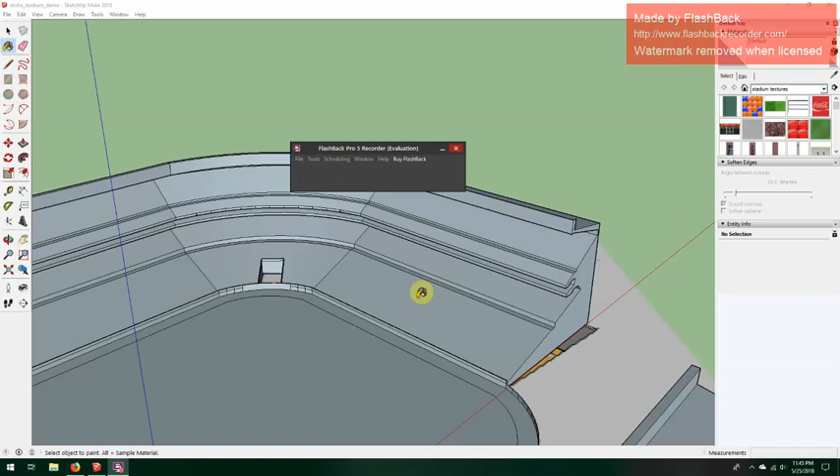As you can see, we've built the stands and the field in the last episode, along with some details on the stands themselves, like the dugouts, the runways, and the driveway for the trucks out in center field. This episode, I'd like to work on getting the fences above the wall detailed out and built.

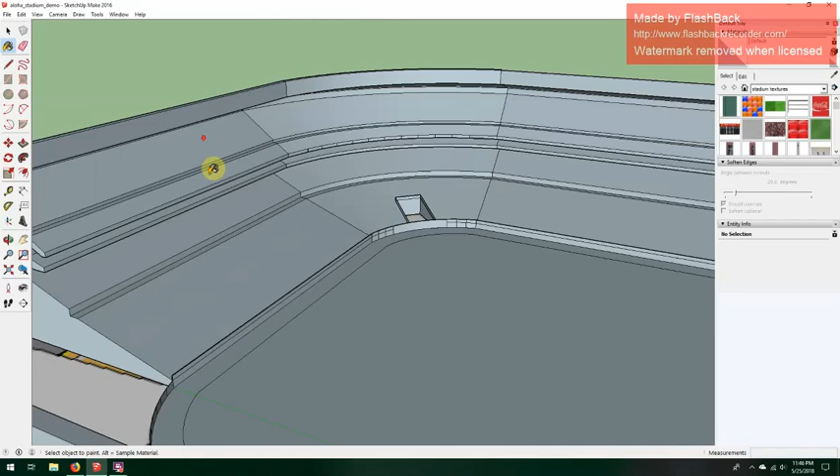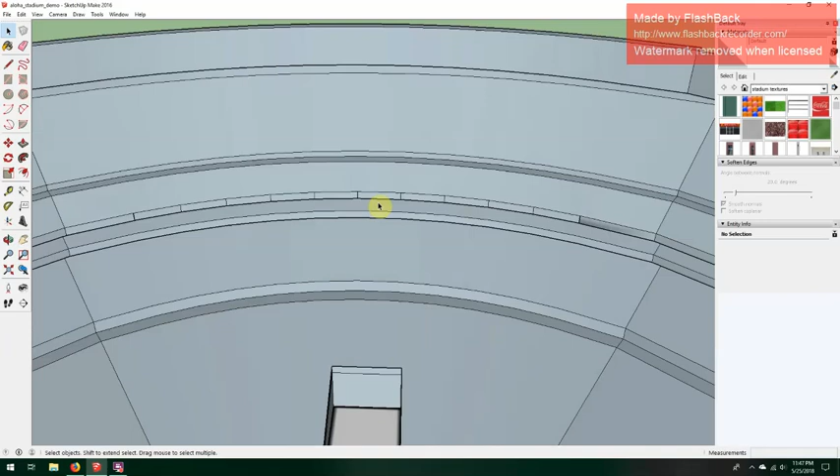So let's get going. The first thing we're going to do is the scoreboard. I have the sections here, and I'm going to start by drawing a line up from here, one of the beginnings of the middle deck. There are four sections I'd mark off for the scoreboard - section one, two, three, and four. I'll show you what I mean.

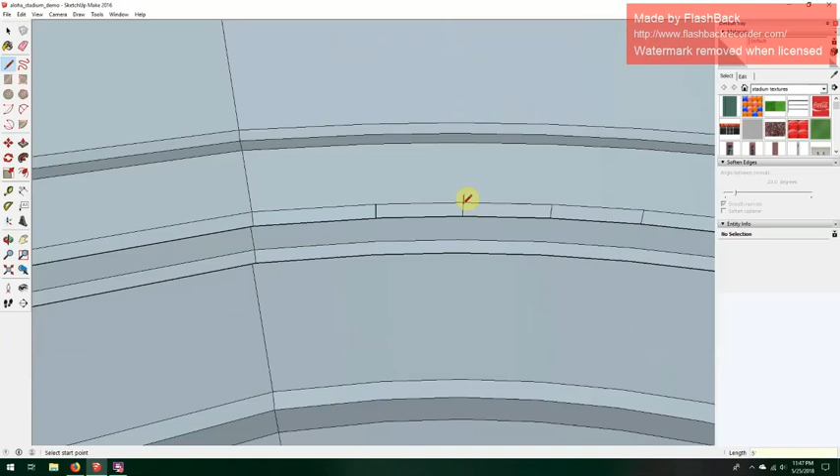So I'm simply going to start here, draw a line up about 5 feet, cut over, then come down on the blue axis a little past the second deck. That's going to be the height of the scoreboard.

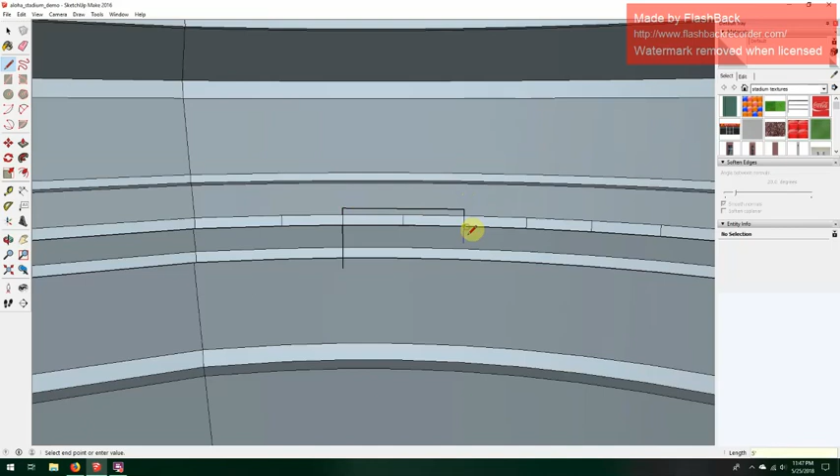I'll skip a line, go to the second line, and do the same thing - touch that point, come back, and it lines up and connects. Then we come down on the blue axis, and when you see that line, you know it's even, and there it draws the face.

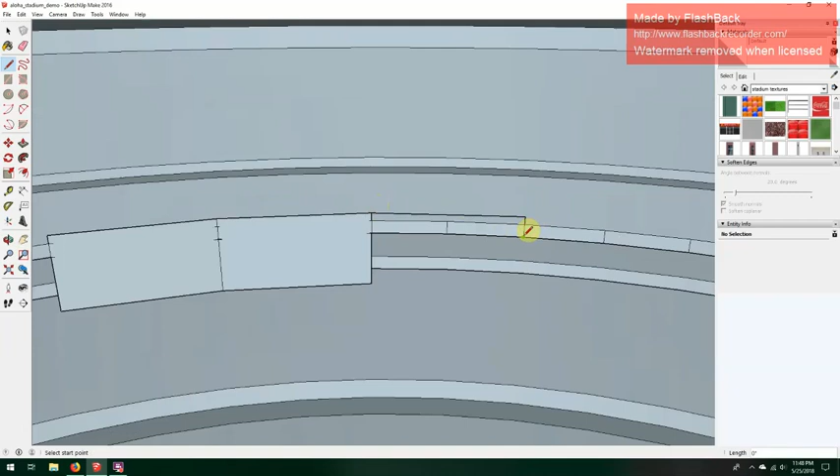Skip another line, do the same thing - go up, connect to the other dot, come down and connect. We want to be on the blue axis, connect, come down, connect. Pretty simple actually. Then the final section - connect, come down, connect. So now we'll have the scoreboard right there.

We'll basically fill in the sections with advertisements in a later episode.

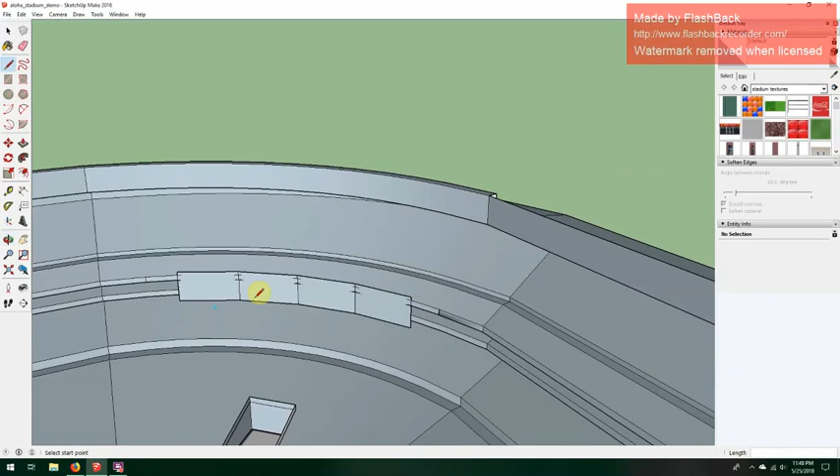Don't worry about these extra lines. As you zoom out it looks worse and worse, but zooming in it gets better. Those lines won't show in the final product, so you can go through and click to delete them, but it doesn't really matter - I'm not going to worry about it too much. I'll just delete that line. So that's the scoreboard, that's one section.

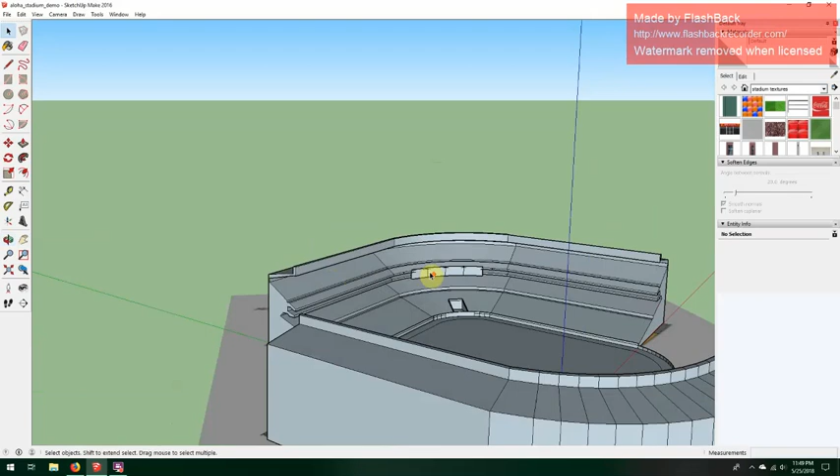Now the other piece is the fence. As you see, there's a half wall, half fence - about 5 feet of wall, 3 feet of fence. I have that marked off here; we did that when we built the wall.

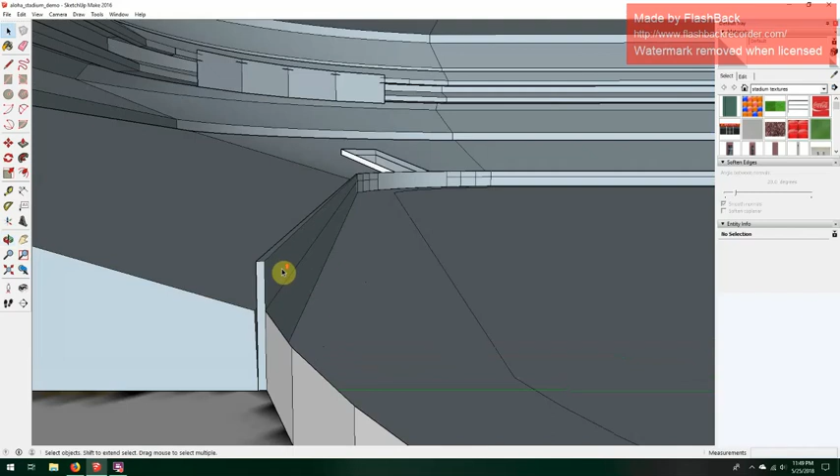Now the problem is that when we do the texturing, the fence is see-through, and this has two separate faces. For see-through fencing, we want basically one face or one section, so we're going to delete this - remove this back face here. To do that, we need to cordon this off.

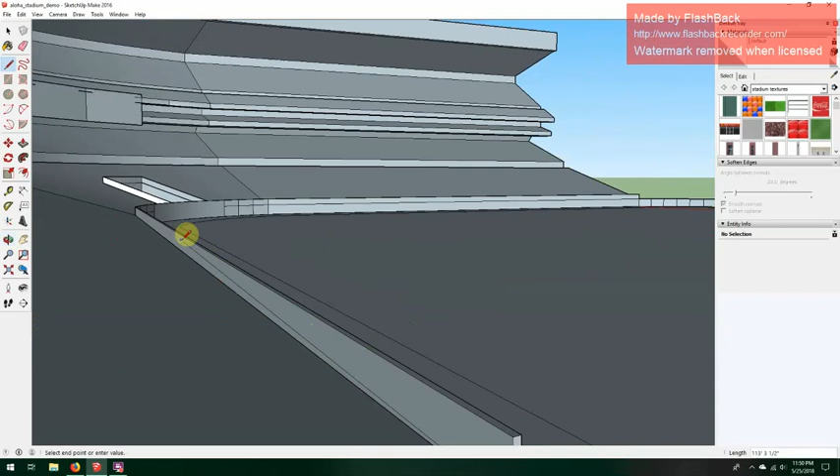We make sure we get the line where we want it, make another line, and mark off the face we want to delete. We're going to draw this line all the way down the straight piece of fence - you can see once it hits that point, it locks into place. There's the pink color, so you know it's parallel.

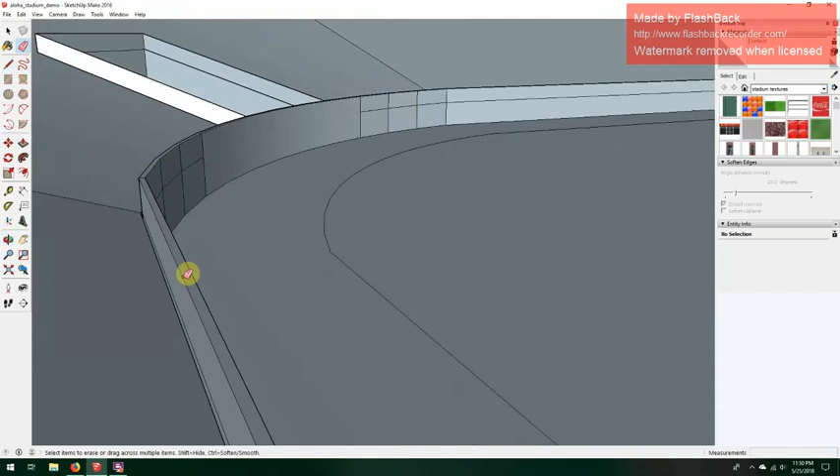And then we also want to draw that piece. Now we take the eraser tool and we're just going to erase this one line, and that gets rid of, as you can see, it gets rid of the face. So if we get rid of this piece, we have one face there.

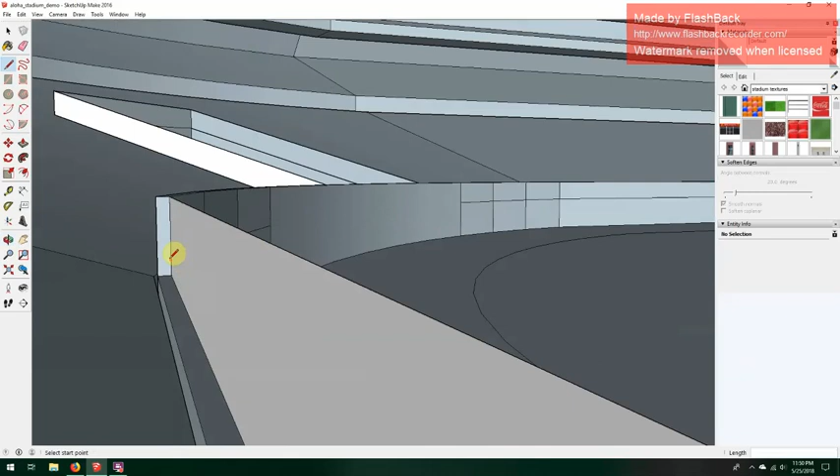Now it's a little messy, as you can see, it's like you can see right through there now. That's because there's an empty section here. So if we close this little area here, it closes both the faces and they become full, they become closed off, which is good. So when we paint later on, this section already has just one face, two sides to each face, but one face, and this section now has one face.

So when we paint on the fencing, it's going to look better. You'll be able to see through it, and won't make extra work having to paint through two sections of fence, and then it can get kind of messy that way.

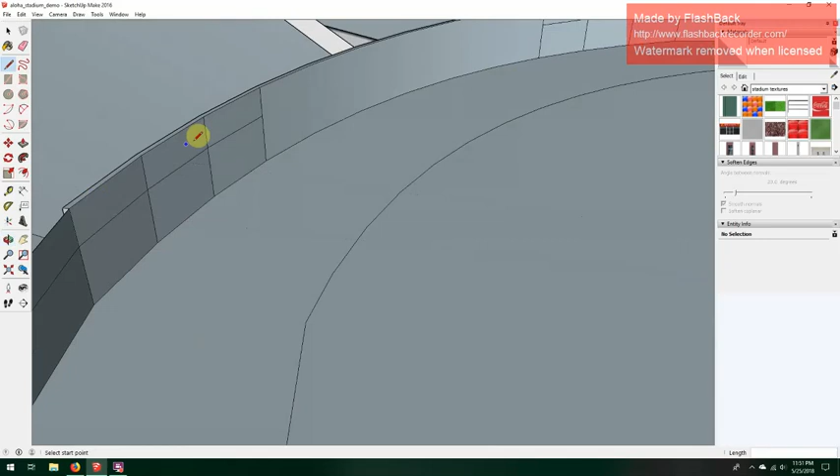So this piece is going to be wall, like as you can see, the center field has like a little batter's eye wall-ish kind of area. And then we're going to do the same thing for the right field side.

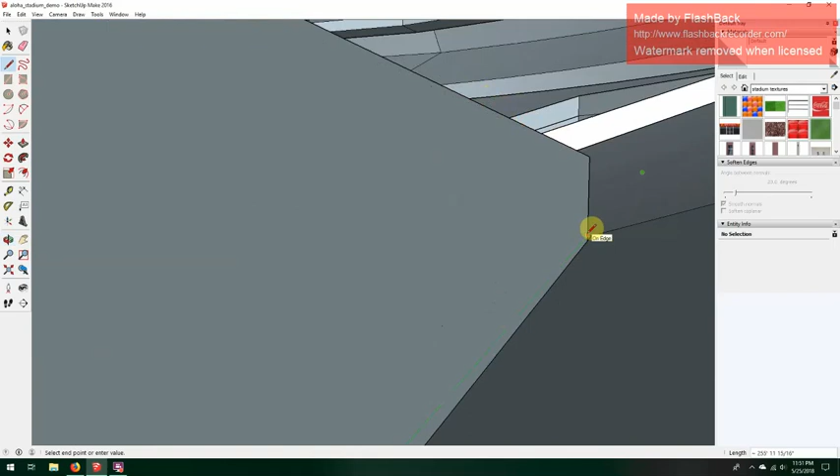So go to the end. We want to kind of go down to where the fence, see the line is, click that line, and then we click here, drag it all the way down, and we can kind of drag across the top here, and we'll get that. Well, I guess the green line should be fine. Oh, there you go. So there's the pink.

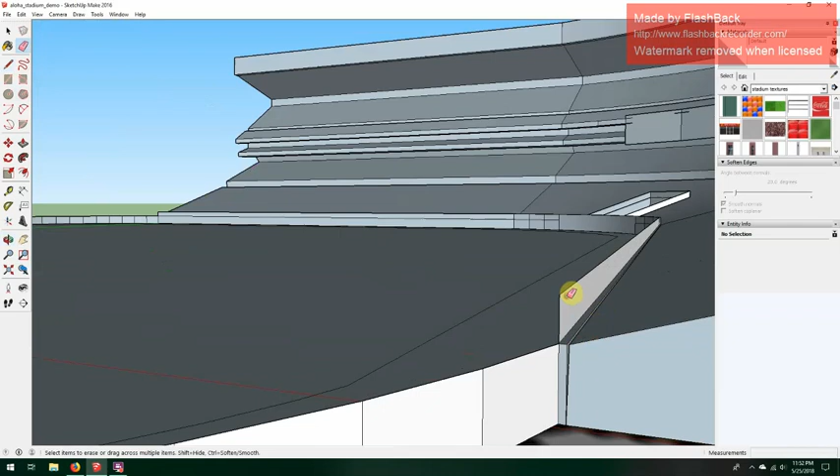Close that off. We just do that, eraser, pen tool, close that back up, and we are good to go for the fence. Pretty quick. Oh, let's just erase this, use the eraser here. So we can, when we finally use the texturing, we can use the fence tool to do that. Okay, so there's number two.

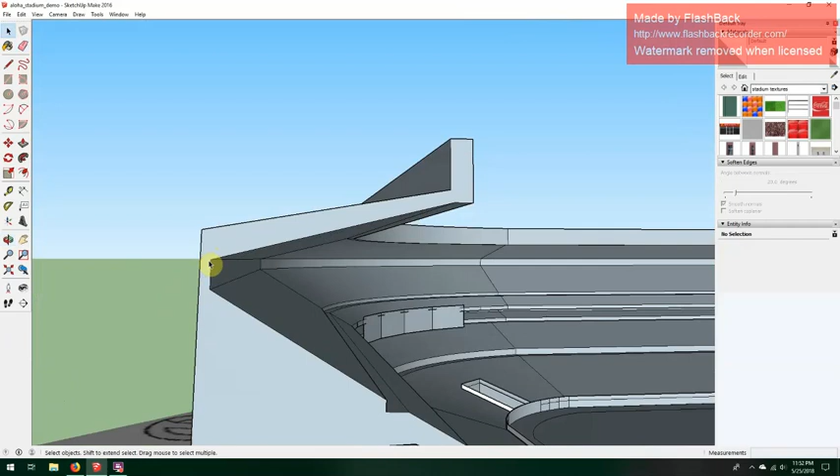Kind of moving along pretty quickly. So the next piece is this area. We want to open this up, and I'm going to show you another trick. We're using the move tool and creating a group here. So this would be a good technique to show something that can become useful when building other stadiums that have other pieces similar to this.

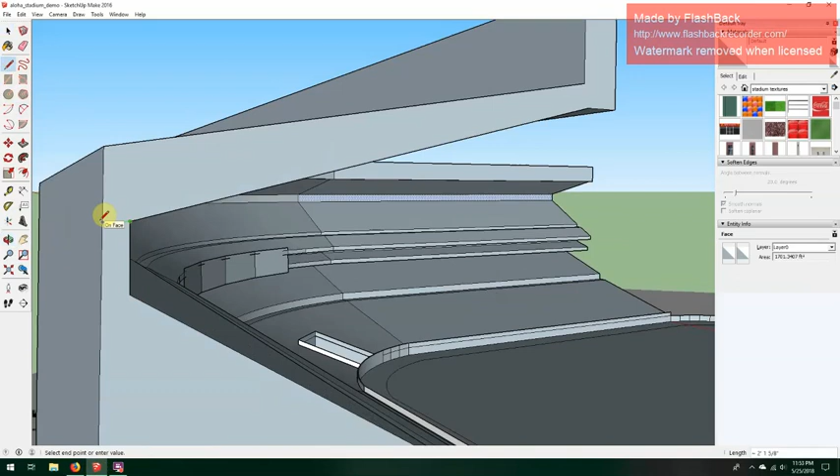So this area we want to open up, basically this little section here, and that section and that section. We want to basically make that open and then build some supports, as you can see up here, just to make it look realistic. So somewhat like the fence that we just opened up, we wanted to kind of draw the line out from each section, from one section back to the other, and make sure it's perpendicular or parallel, so we have a straight line.

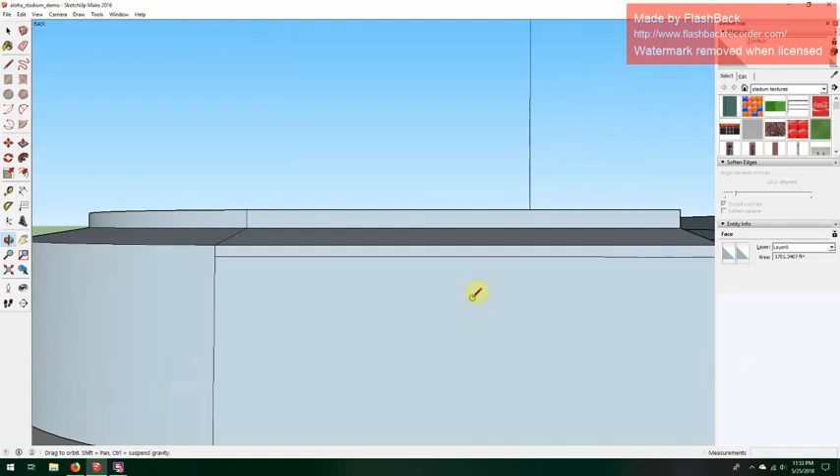And then we want to just draw out, mark off the section that we want to face. Now again, if you drag to a parallel line, and then you finally can get to that pink, and then draw it all the way to the next section. And you can do the same thing with the bottom, and that should already be there. So just like that, really quickly, we've created a section on the back that we're going to remove.

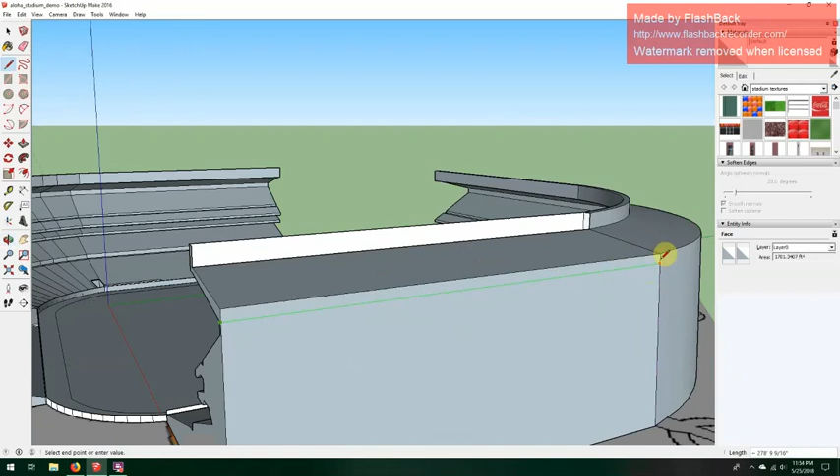Now we'll do the same thing with the right field, and then I'll show you the curved section, which will be a little bit more involved. So we'll mark this off. Well, okay. Let's go, and we'll get this piece. There we go.

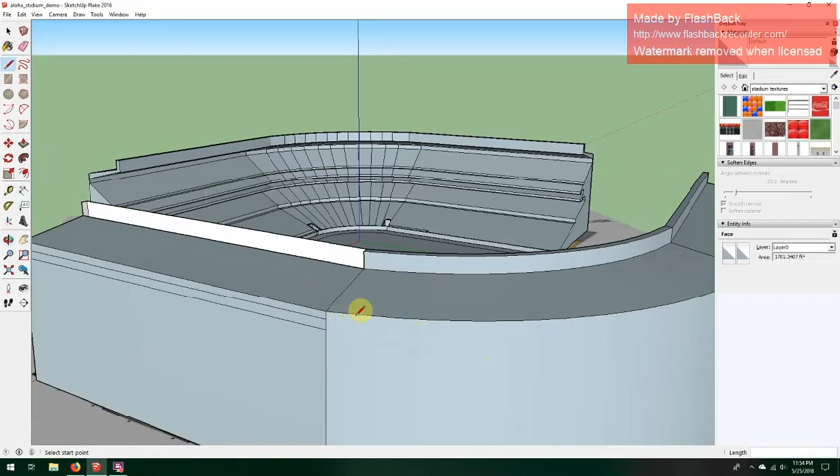Okay, now each curve section, which you can't see right off the bat because of the way we did this with the follow me tool, each curve section has many small sections, so going up and down. So what you can see, you can either mark out for yourself. I'll give you an example.

So every green dot is basically the beginning of a section of a face. There's the midpoint, which is blue. So then you can mark off to each green dot. What I would do is draw down to the green dot below it. Now you can see when you click on the face that it's separated that face.

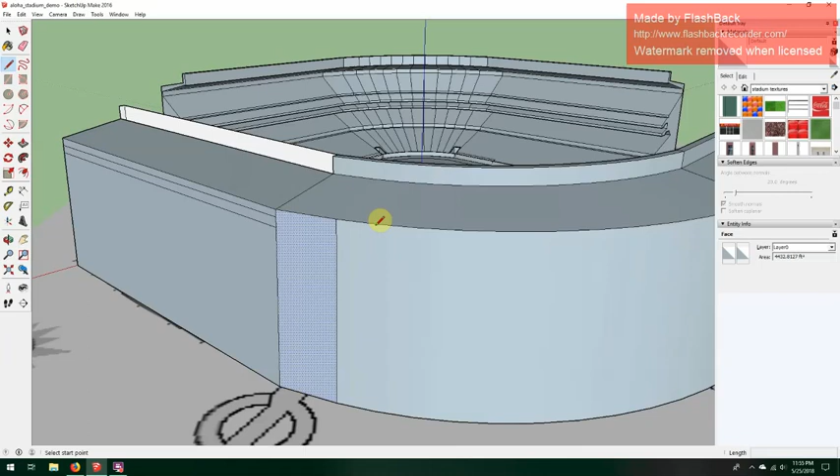So you can do the next one and just kind of go down. There you go. So you see we have, and as the curve becomes tighter, the faces, there becomes more and more faces here that they might get.

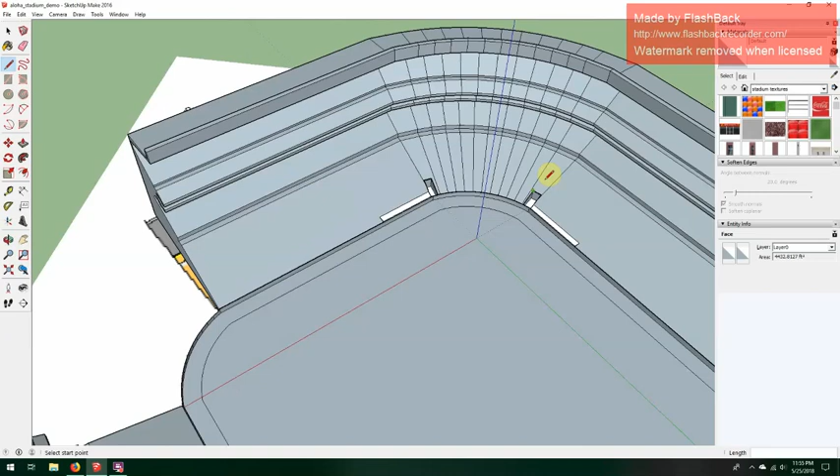So you can quickly mark these off if it makes it easier, as you can see behind home plate, it's already been done when we did the follow me tool. You see the many face sections. It can become a little difficult to work with when you're doing textures, but we'll get to that in the texture section.

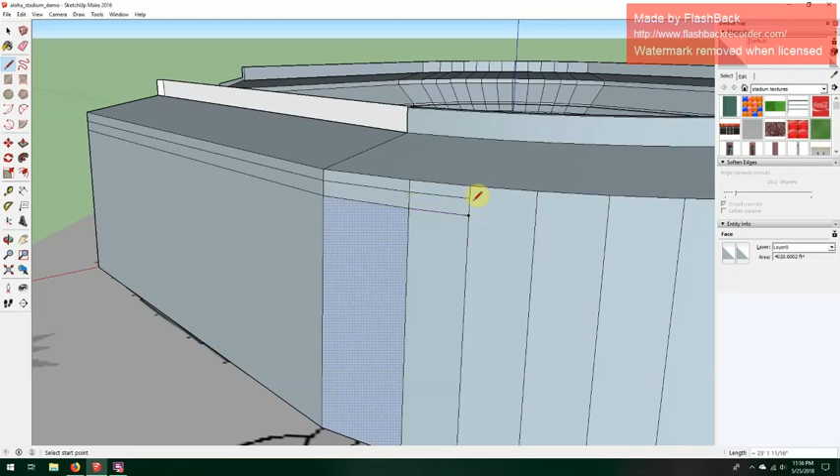So the point of this is we need to draw lines to each section. Now when you draw it, you don't have to have the pink purple. It's nice to see the pink purple, but it generally likes to stick where it's parallel. So if you draw this, it generally likes to stick, just kind of make sure, there you go, it kind of pops there to where it's supposed to go automatically. Don't ask me why, it just does.

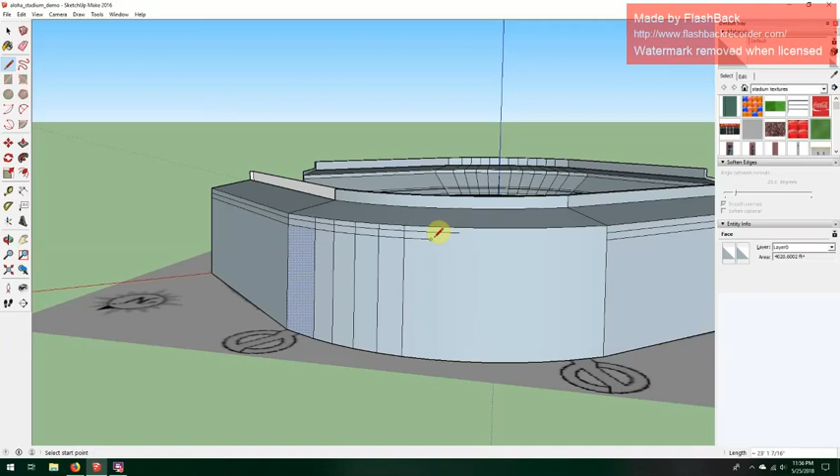So we can quickly do that to both, and we're going to make these separate faces. Now you just kind of have to go through. You don't have to mark off each line. If you just kind of drag this around, you see it automatically finds the parallel section, if you're careful with it and you drag it slowly. So you can do it like this to each face. Now, as you see, there's a blue line. If I drew this down, it would be perfectly matched up with that.

So this isn't really concerning. We just need to make sure that we have enough, we can mark off the faces going across that we want to open up.

Okay, so we'll just keep doing this. I'll just do one side. There's another one, probably two more. Oh, there we go. And oh, I didn't do it correctly.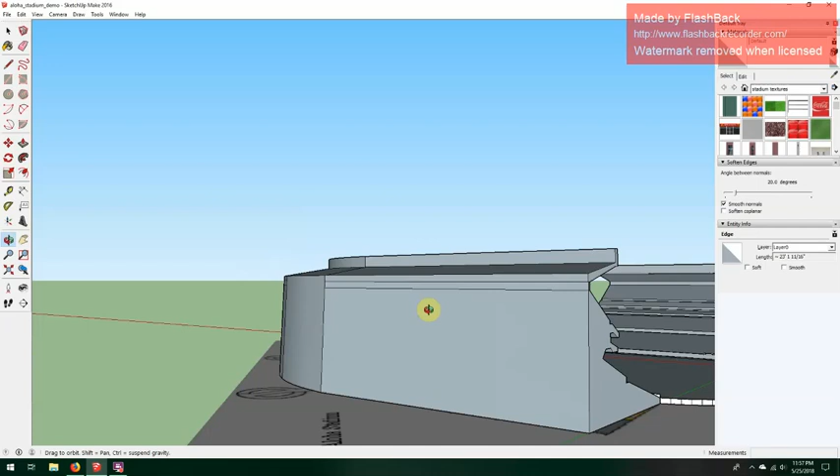Hold on, hold your horses. I should have started from, I think I might have not done this correctly. So I'm going to use my friend, the good old undo. Okay.

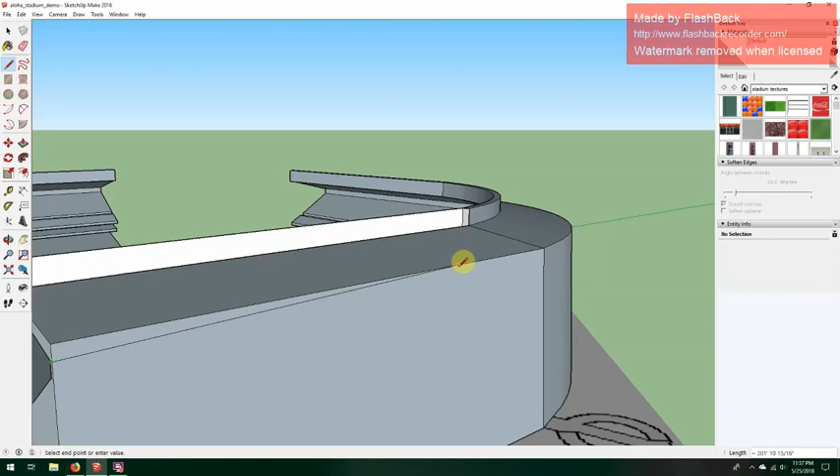And we're going to just... 6, 1, 5, 8. That is definitely not parallel.

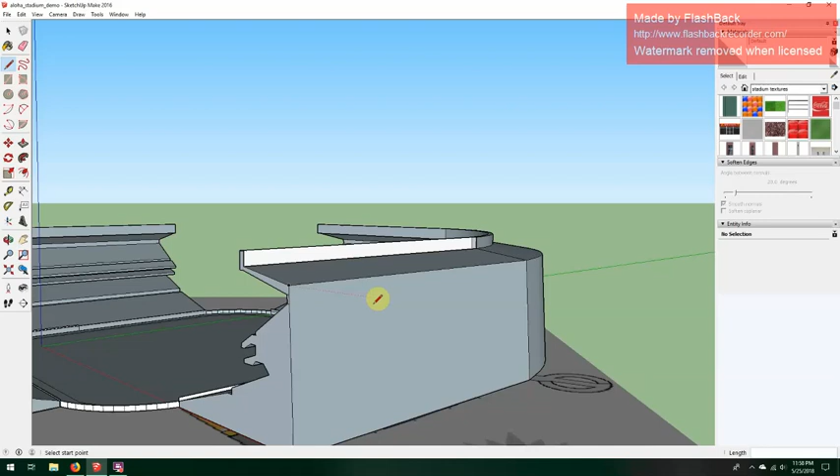All right, we are going to check out the green, and we will. Okay, that's the one. So that's why you have to double check, but you'll realize this stuff is working.

Okay, so we're going to use the green. I'm just going to go through quickly, and as you can see, even as many times as I've done things, you're still going to make some errors. You're still going to need to go back and fix things.

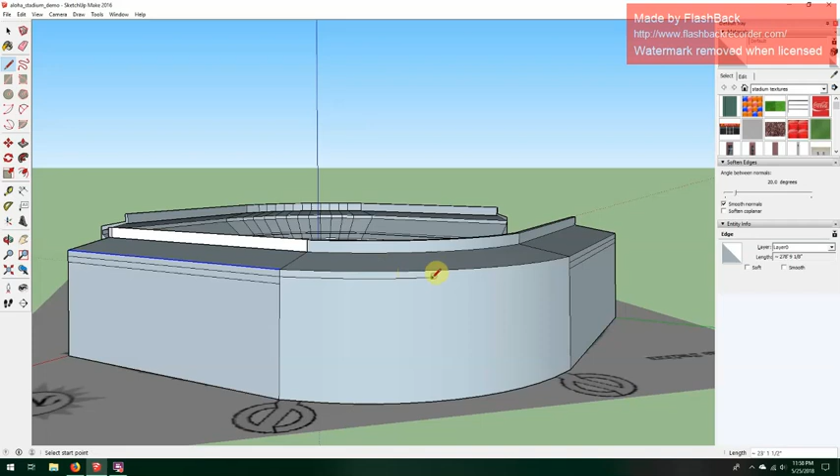Hopefully this will work this time. This should match up with the other. There we go. There we go, now that matches up. So we'll just do this.

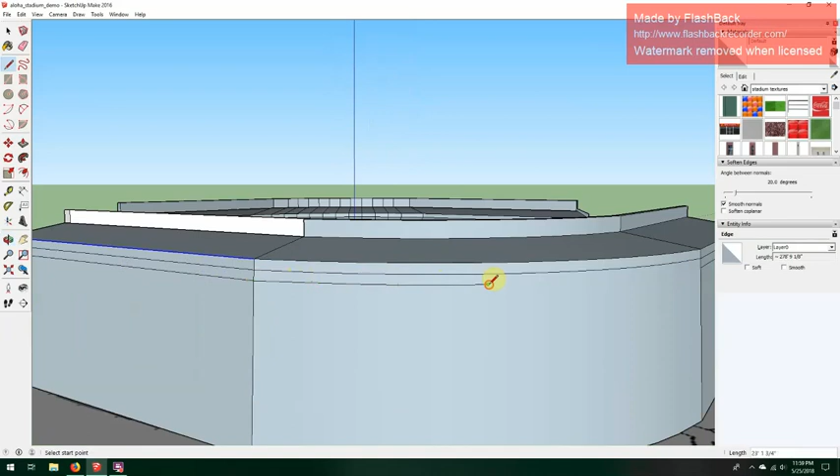I've done many of these stadiums and many of these things. It's just I'm not perfect at it, and it's going to take some work just to fix. Okay, almost there.

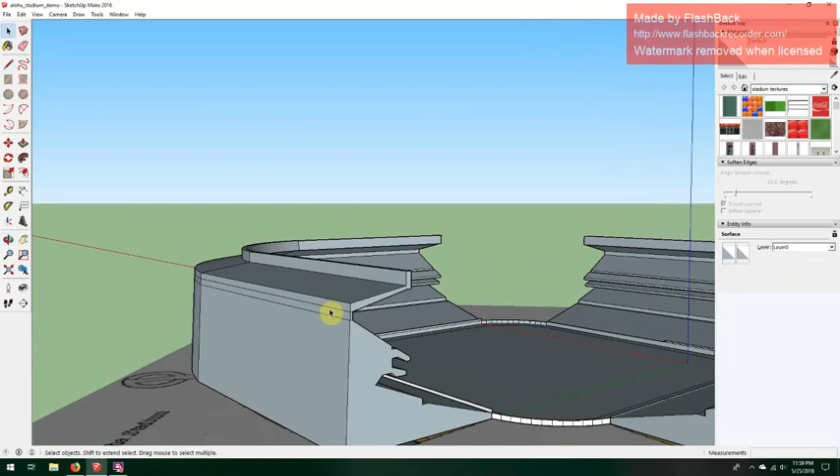All right, here we go. So we have our faces. Now basically what I'm going to do here is simply click on the face, delete. Click on the face here, and delete that as well. So we have an open section. Click on that, and that. There we go, we have the open section here. Click on that, and we'll have the open section. All right, so it's kind of cool, right? You kind of see, looks kind of like the picture.

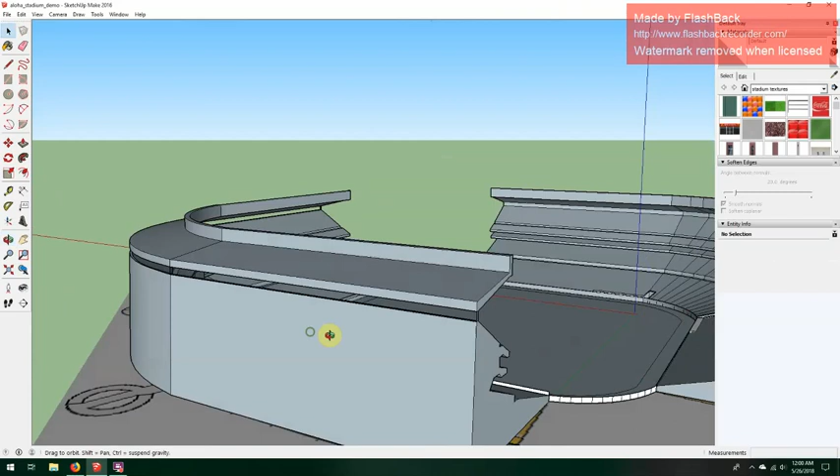Now what I'm going to use here, first thing we want to do is close off. As you can see, there's some see-through areas here, which you can see inside, which gets kind of ugly. So we're going to close off by simply crossing off that section. I think we might have to do the same thing, cross off that section that does the straight sections.

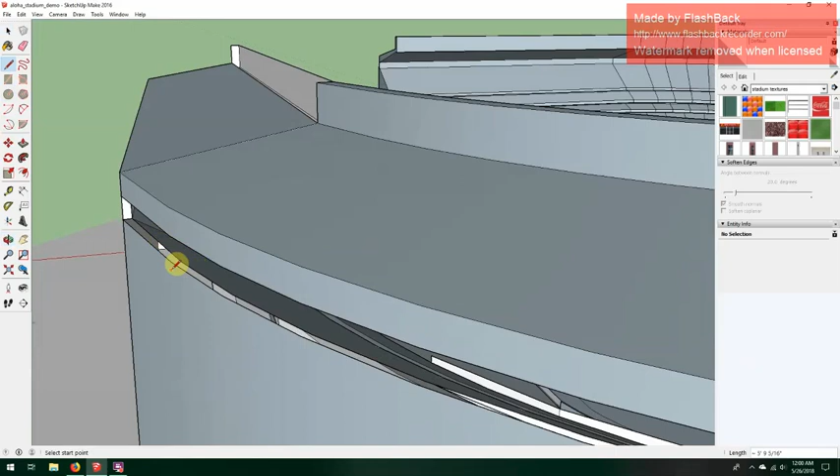Then the only thing is you kind of need to clean up, kind of need to clear off. That's not working. Well, the... oops. We'll just clear these off.

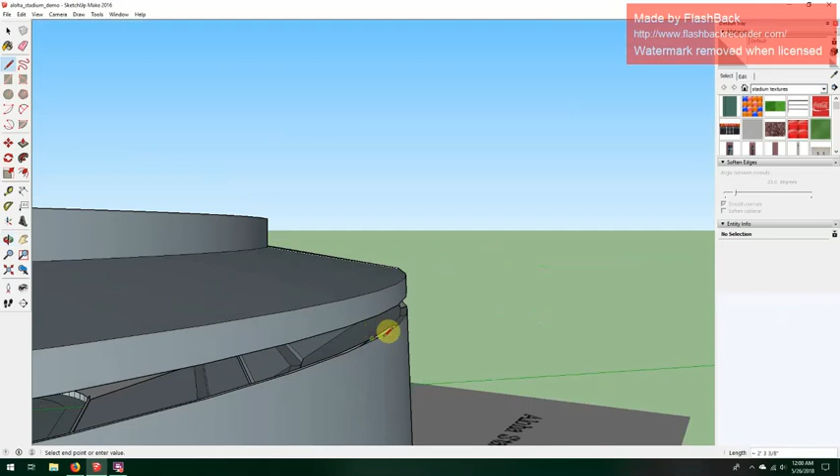By connecting the green section. Oops. Sometimes you need to cross them because they have to be even, and they're not sometimes. That's fine, it doesn't have to be perfect. We're not looking for perfection here.

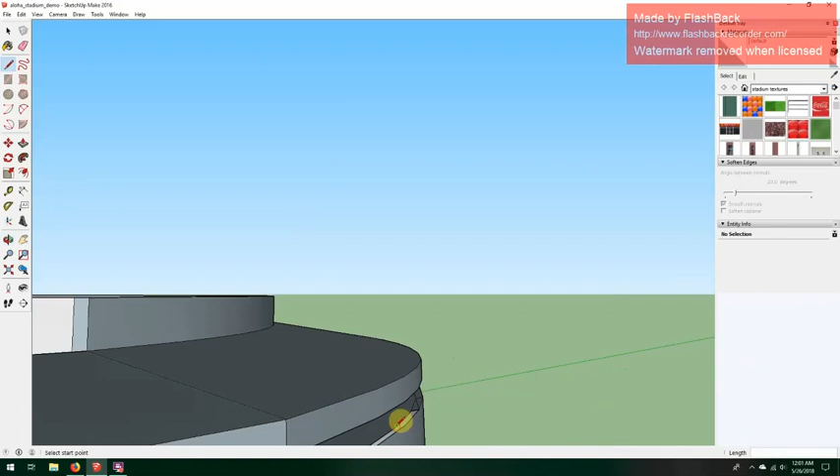All right, close that.

Okay, that's all right. Now what I'm going to say is we're going to build the little supports.

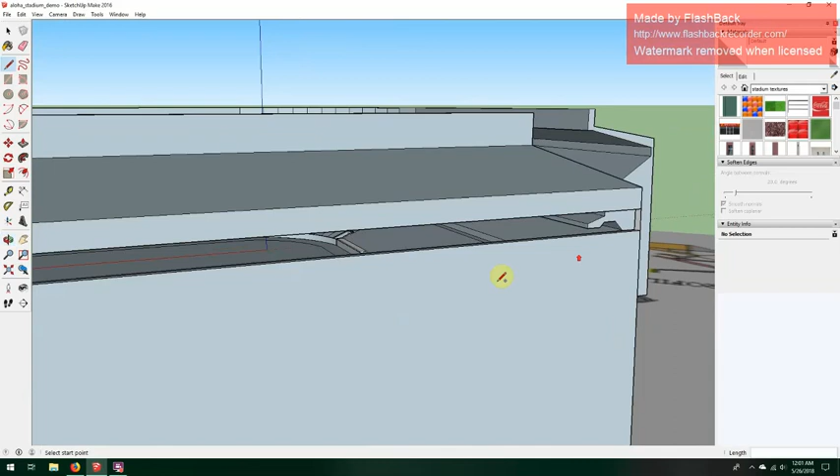Now what we're going to do is take this section that was left over. I'm going to use the push-pull tool to pull it out about 2 feet. We give it 2 feet.

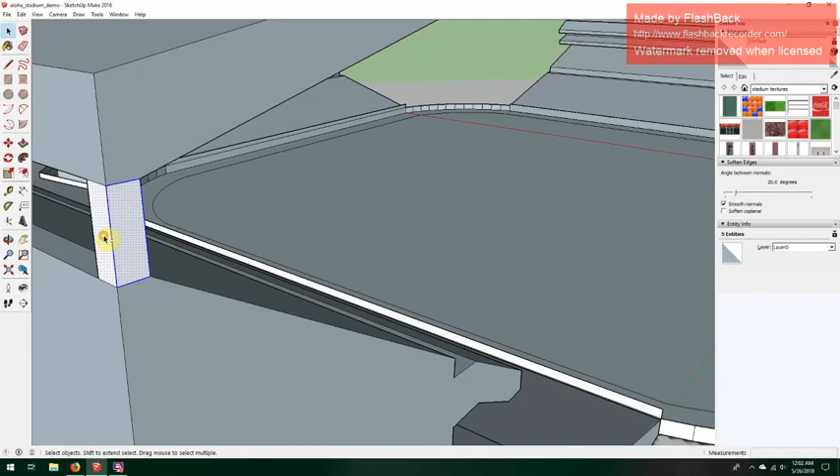And then what we're also going to do is, okay, so we have the full group. Now we want to select each edge by double clicking, and that includes the face itself in the middle and the edges. You want to do that on every side. Sorry, excuse my zooming out and zooming in, it's kind of my navigation. It's all the way around. Double click. Okay, so we have all 4 sides.

Right click and make a group. This is useful because now whenever you click off of it and click on this piece, it selects everything all together.

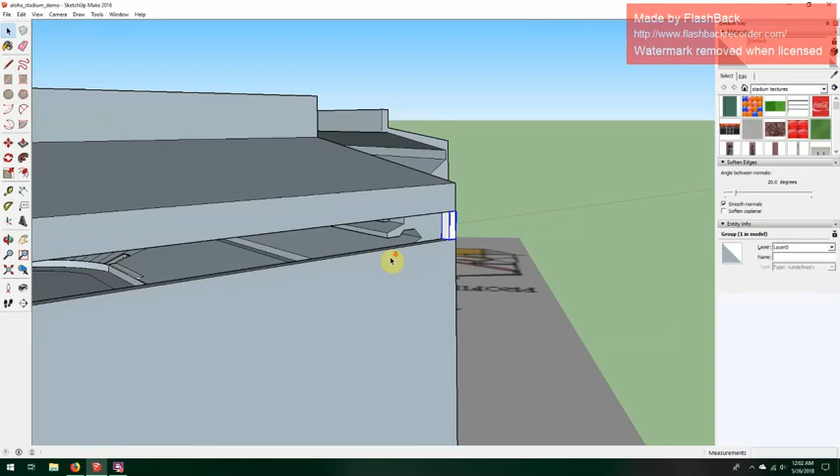So what we're going to do is copy this little section, this pillar, and move it, replicating it across this straight section here. We're going to use the move tool. Select this corner, hold Control down, and click, then you can drag it. You can let go of the button, you don't have to hold it down. We're going to drag it all the way to the other end and place it there.

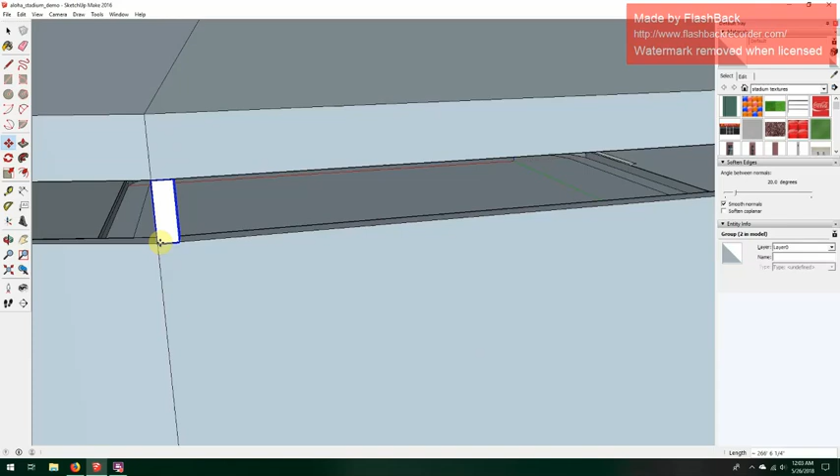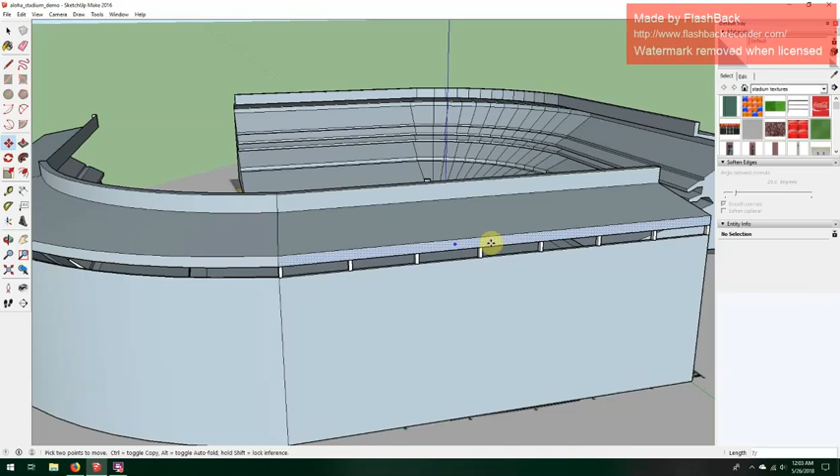Now, really cool thing - after I've clicked, you can decide exactly how many you want across, and put that number followed by a slash in this field. Type 7 slash, it'll evenly divide 7 more in between those two. If you hit enter, you can see, well, there's 1, 2, 3, 4, 5, 6. I put 7 slash, but it only puts 6 there, including the one I just put down, so that's 7, I suppose. I think that looks good, 7 would work.

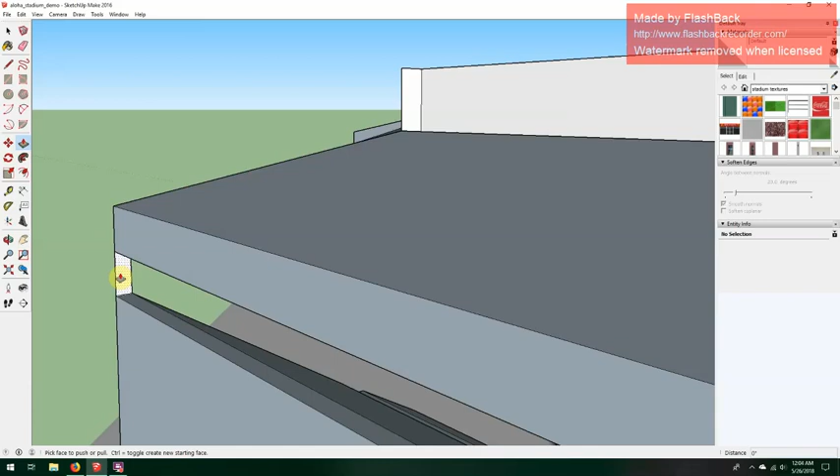So then we can do the same thing with this side. We'll just push pull - sorry again for my navigation, it's not the best - to pull it out a little bit, put 2 feet, type it, enter.

Make sure the other side is okay, and we want to double click both sides. I could have used the other group, I guess, but I just want to make sure because this is perfectly lined up already. And make a group.

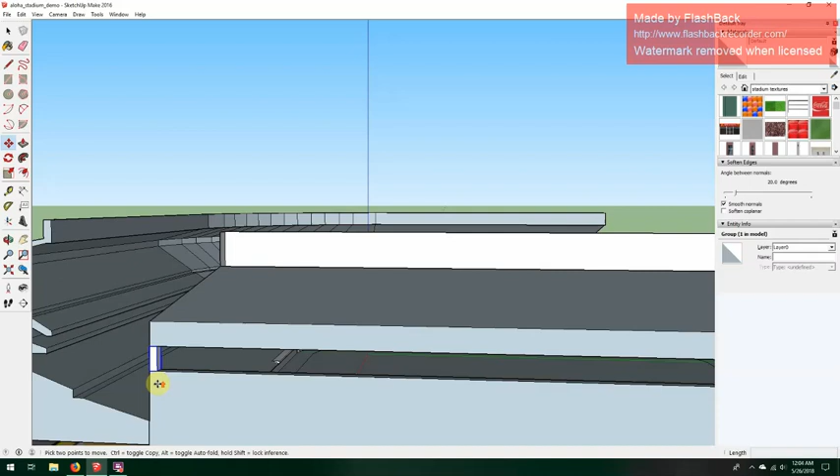The move tool, which is the M key. Control, just drag it across. Type 7, enter, 7x enter, and we have that there.

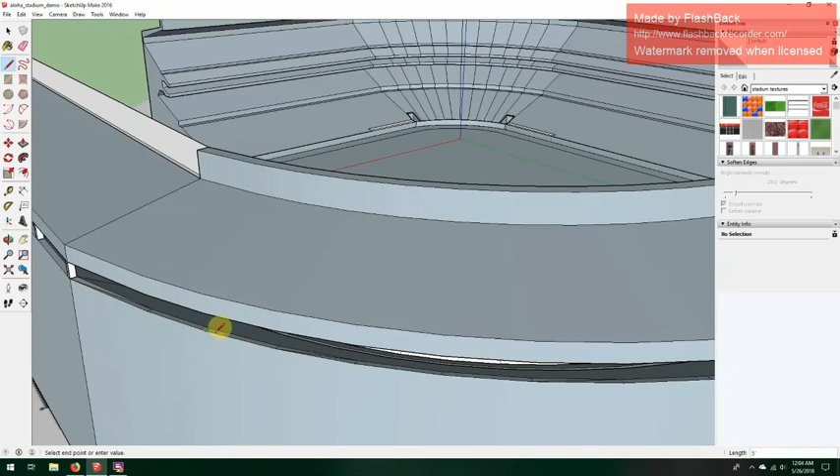Now the curve section is a little bit more involved, so we're just going to create these by hand. We're going to skip every other one. I'm going to go 2 feet across, so there's 2 feet from this little line here. We'll just draw another line across.

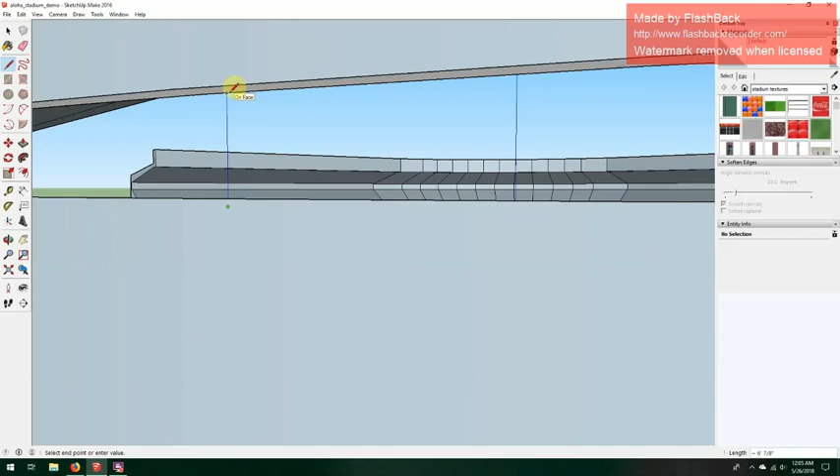And then we'll just draw these lines up. That's going to be tough because we have to kind of see the top part. See if we can do this. Alright, that's not going to work, I don't think. But maybe, just maybe - it's really tough to sometimes get the right vantage point. See, that did not work.

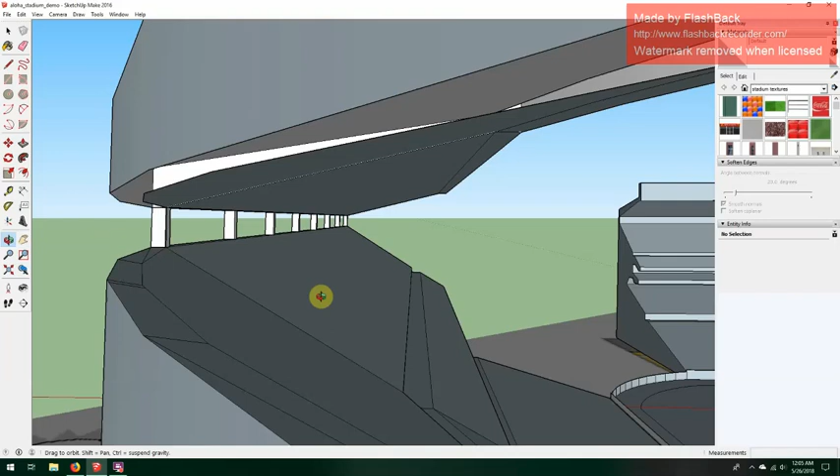We're a little short here on this, so let me see how this is sloped down. I think that when we did this again, we still didn't get it right. I think that's the right distance though.

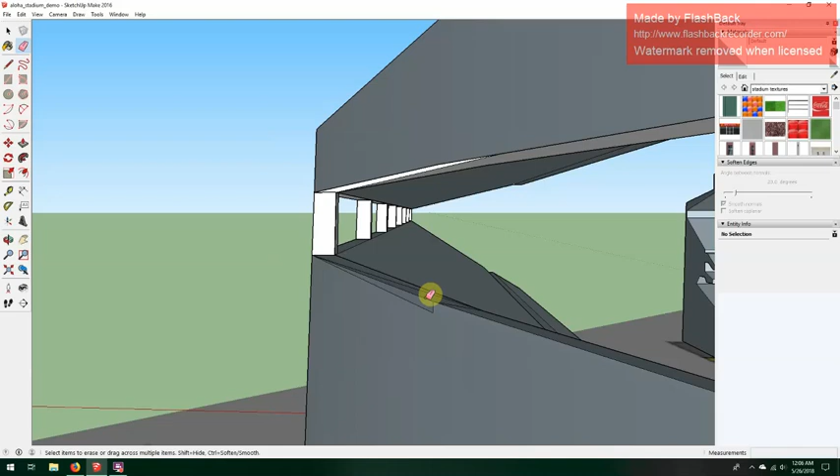So what we're going to do here is slice this off, as you see here, and create a new face, and slice. Now this is just my perfectionism, but we're going to slice this off here, as you can see.

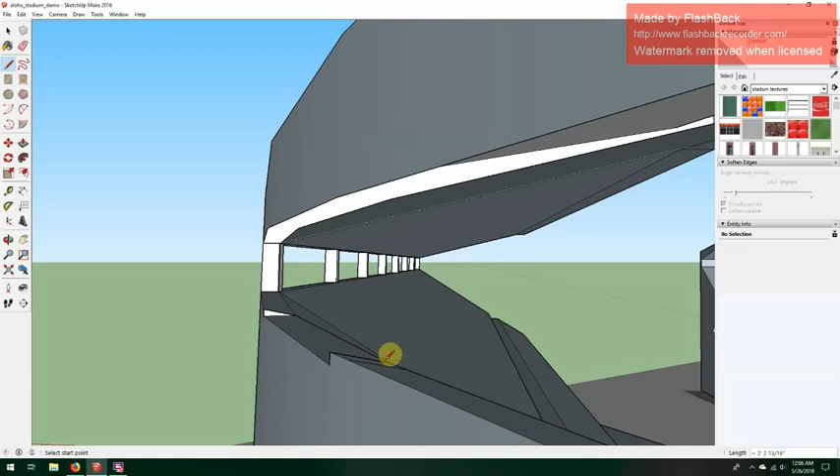And then we'll just draw another - see, and we'll get rid of this as well. Alright, so as you can see, we still have a little bit of work to do. Sorry about that, I didn't do it exactly perfectly, but see, this is what happens.

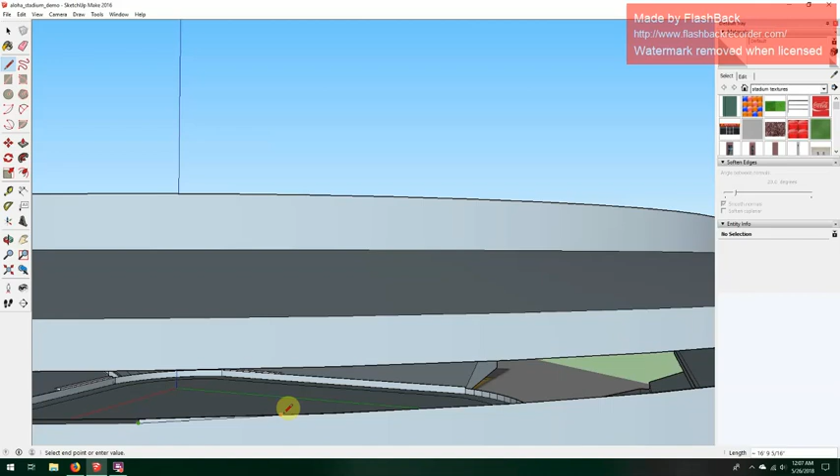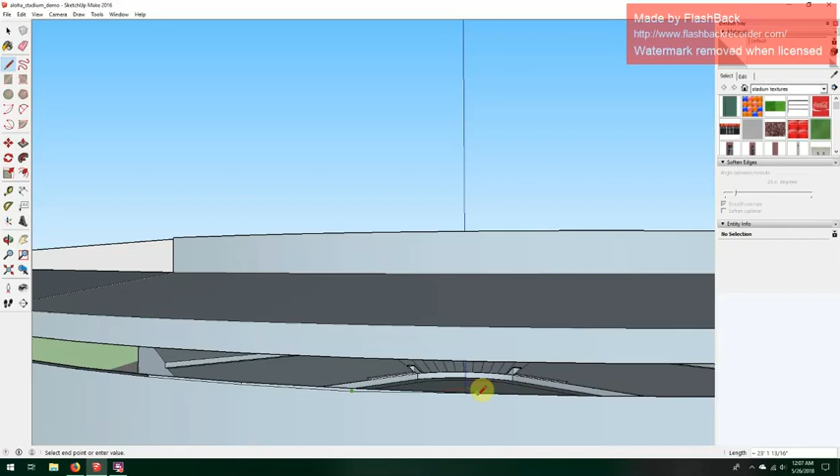So if you just allow me really quickly - apologize, I'm just making the sections even, because I want this to look good. There we go.

So if I just - let's see, oops, I didn't do that section. Okay, what I'm going to do is pause this and fix it and bring it right. Okay, I'm back, sorry about that. I just had to fix the little issue with the lines I did.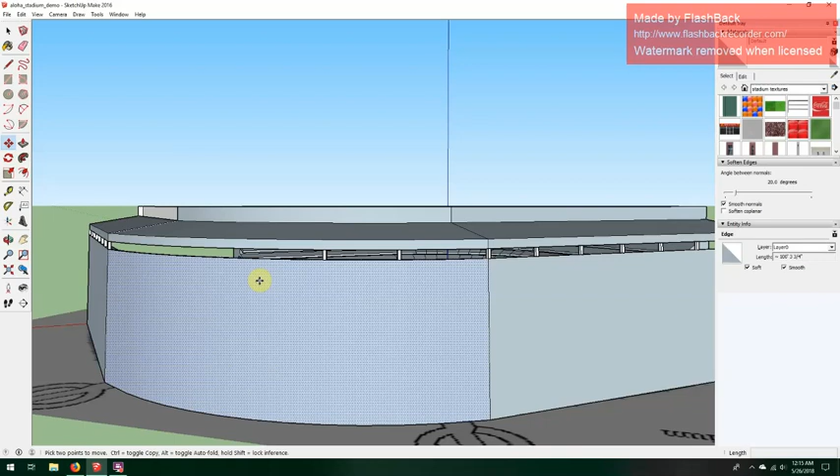So it's still not perfect, but I think it's more of a function of the actual follow me tool when we created the thing, but it's good enough.

So what I decided to do was just show you what I'm doing. I take the group, click on that, use the move tool, click on the corner, hold control, move it over to where I want to put it, which is on this line. I know it's a little off center.

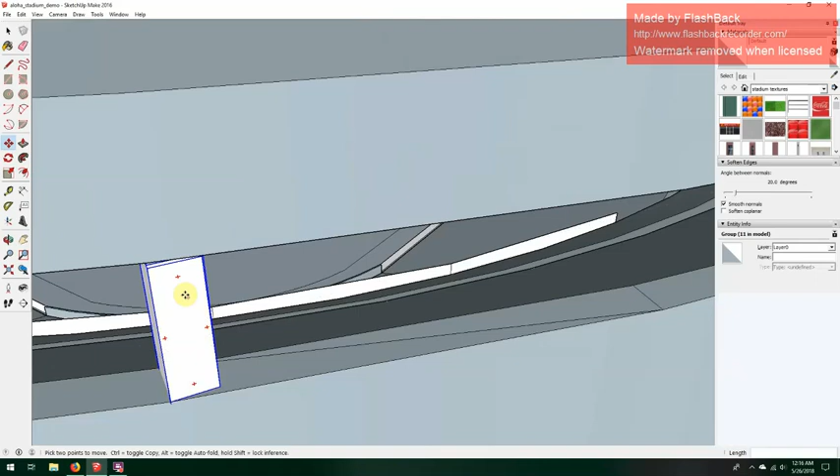While you have the move tool on, if you hover over the faces, you can see these little things which you can actually rotate. If you do the top, you see the buttons, you can see the protractor, so you can rotate it just by clicking and holding very slightly. You can get it pretty good, close enough. So we'll just keep doing that.

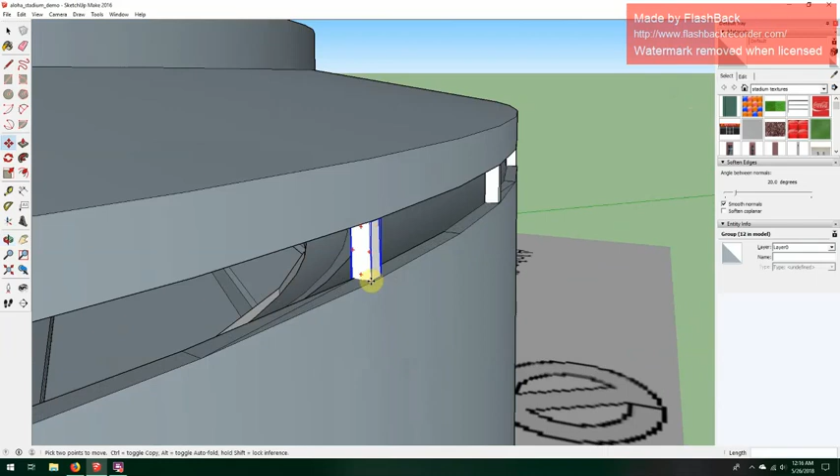Move tool, and we'll just drag, that's easy enough. Move tool, skip one of those sections. Yeah, we'll move this over like that. Move tool, actually that should be it. So I think we got it done.

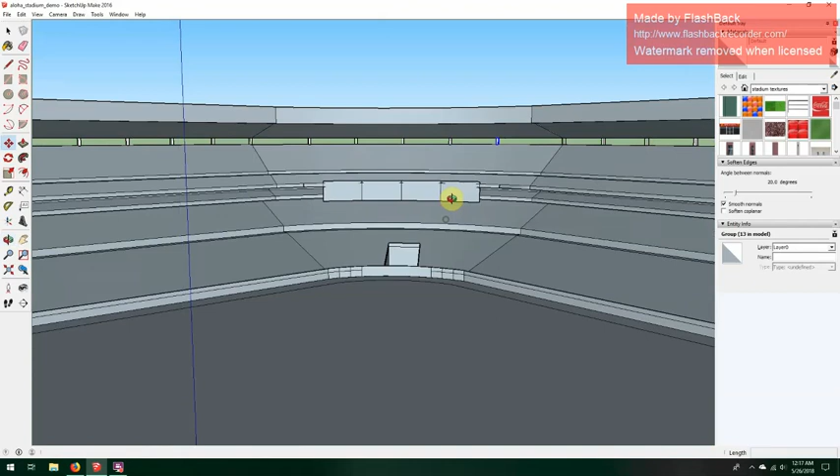So let's go back to the vantage point, and I think that looks pretty good. It looks a little more realistic now.

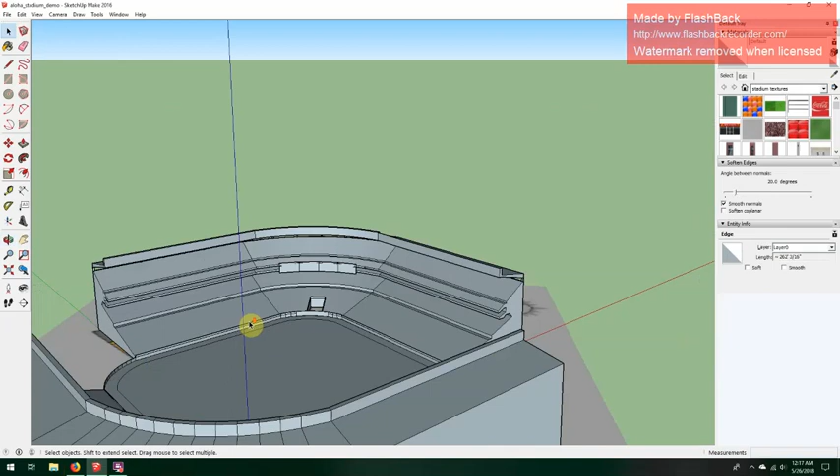Now, according to the picture, if we were down at field level, then this area here would also be open. Actually, the whole thing should be open. This piece should be open as well. Let's look at the picture. Oh, maybe not, just that piece right there. But I don't think we're going to work on that yet. So that's the piece.

There's the roof piece. Now the other piece I want to do is the lighting. So the lighting, as you can see, the section is mostly the whole. Let me zoom out a little bit. So you zoom out, the lights pretty much cover that whole area, except for the middle section again.

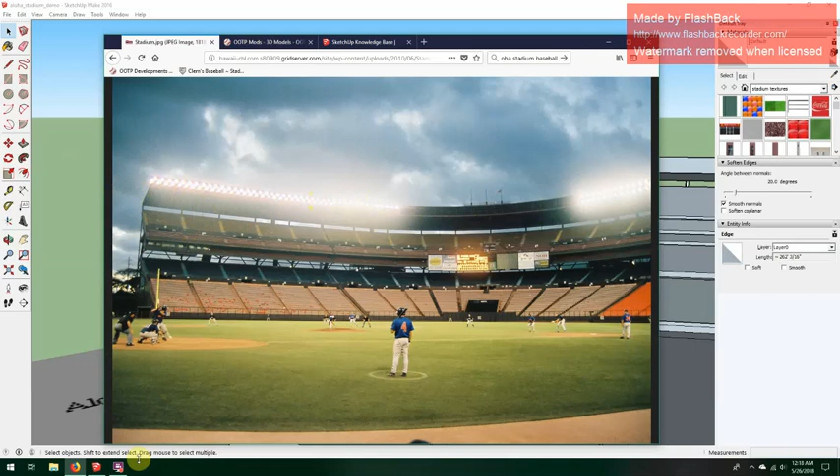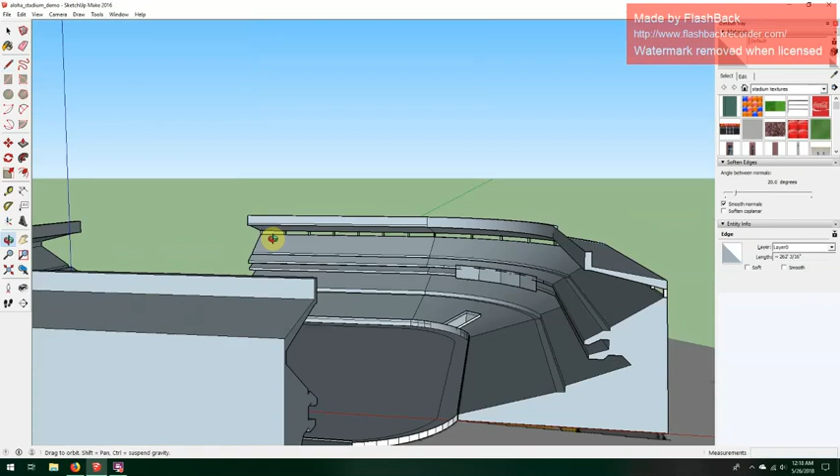So that's good, we don't have to do that, but again, this is going to be a section where it might be transparent, so we might want to just close this off here. We can make the lights like that, and we'll close off this area. Oh, that's already... not sure why that was like that, but we will close this off.

And we'll close this off just so we have what we're going to do here for the lights eventually. So we have the lights on this side. We'll have a little part of the, now this piece is going to stay. We'll have some kind of texture that will somewhat look like that.

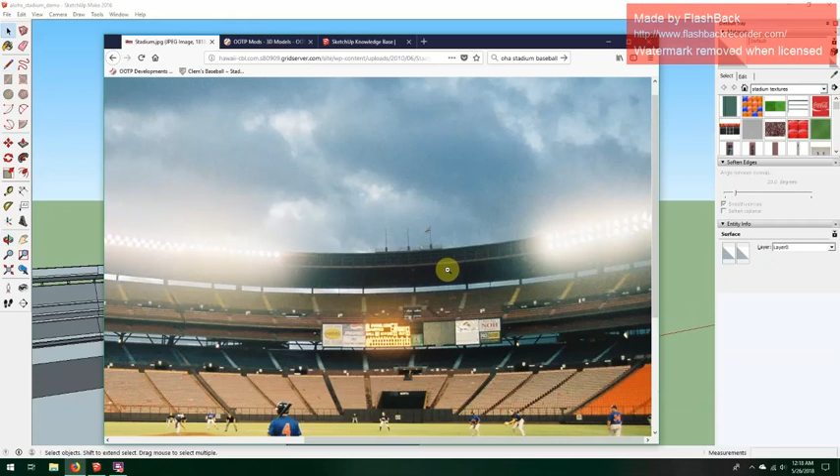Okay, so I'm just trying to think of what else we can do. What I might do offline is the same thing we did on the center field section, or the outfield section, just behind home plate, open that up. But I think for now, that's good.

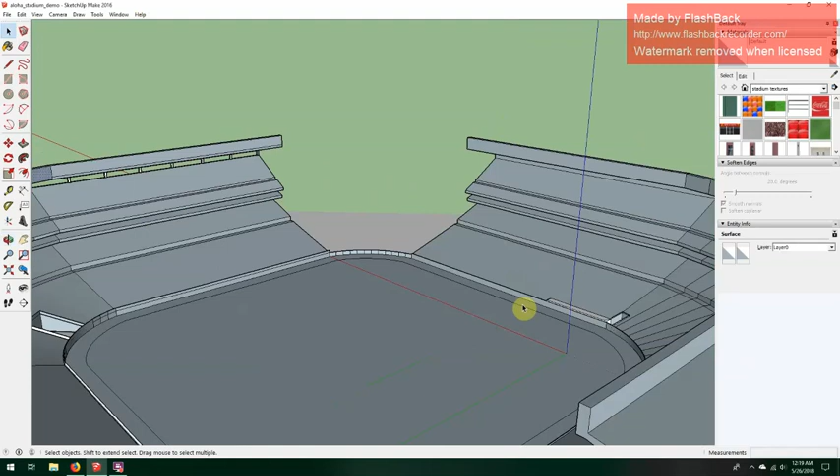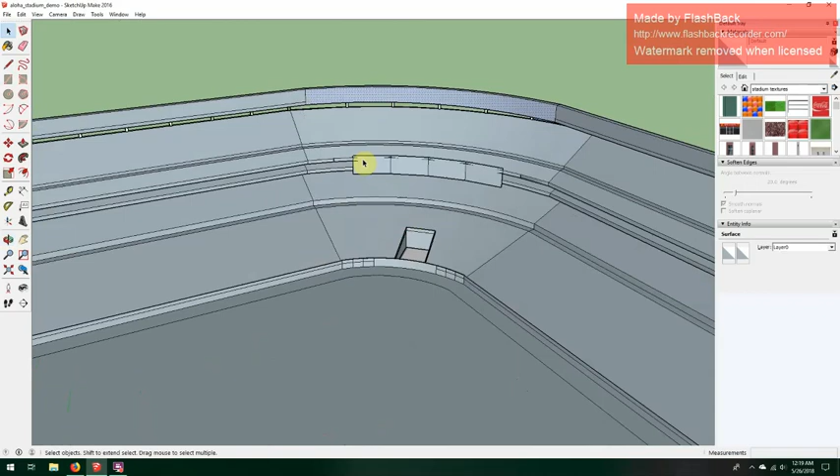I'll just stop here. In the next piece, we might actually get into putting some textures on and placing the infield on the field, and doing the other finishing touches, which is pretty much where we want to be. So what I tried to do here is make sure we get all the base down, all the faces that we want. This is, like I said, a very simple stadium for the most part.

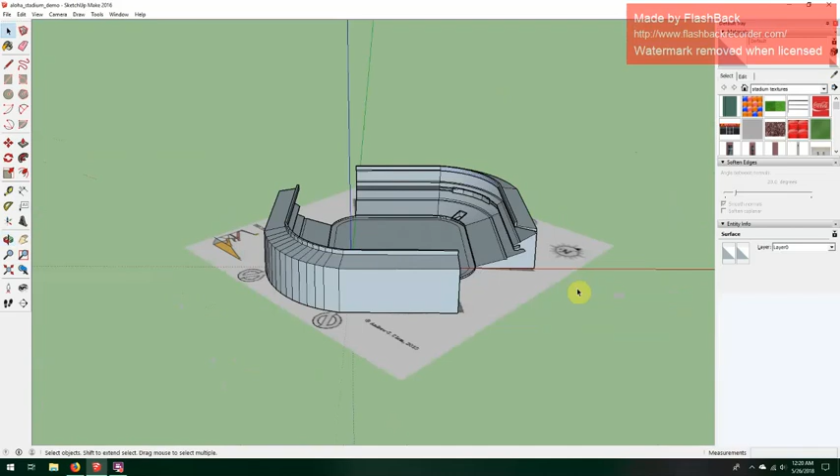We can build some fences here up the side to make it look realistic, but we're just going to keep it simple for now. So I'm going to open up the back here on my own, and I'll stop the video for now and resume next time. We'll start working on some textures, and I'll teach you how to do the 2D crowd textures, because it can be very difficult getting the corners lined up. But we'll look forward to that next time.